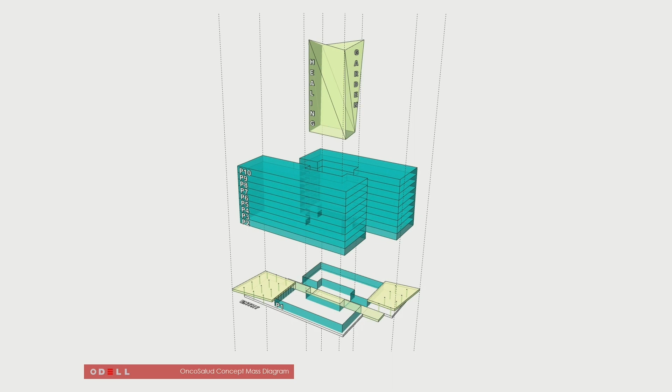The project itself began in schematics as it's an addition to an existing hospital. And so we began the schematic design in 3D. So the whole process has been in 3 dimensions. It's all been a BIM-based collaborative process. Working it onto the site, where it goes on the site.

The goals of this presentation is not about the design of the project. It's about the integrated delivery that we've been managing through a cloud platform. So in order to attain success, we must have an integrated project team. That is the only way we're going to find success in these projects. So again, half in the States, half in Peru, 2 different languages, 1 model, 1 collaboration platform.

So how are we doing this? We're doing this in multiple ways. We're doing this through SharePoint. We're doing this through BIM 360. We're doing this through the Revit Viewer platform that Autodesk has provided us. We're doing this with Bluebeam. So those are our 4 main tools. That's really almost all the tools we need to do the collaboration.

One of the goals that I always bring, I've been the director of BIM at Odell for about 6 years. And before that, I was BIM guru at another large firm, and before that, another BIM guru. And the thing that I've learned is, if you can do it in a simple way, you do it in a simple way. You never go overboard, because you do it simple here, then you do it simple here, then you do it simple here. And the next thing you know, you have this really complex system, but every step is really simple.

So we talk about the BIM execution plan. And we talk about it in terms of how it fits in with the whole scheme of things. And it's typically from a contractor's perspective.

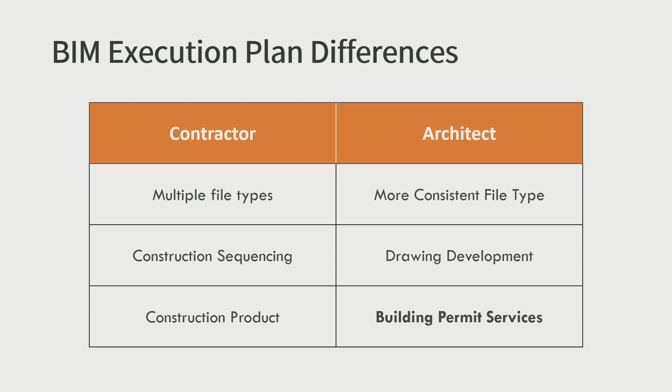It is a necessary file, because they're getting file types from all kinds of different places. They have to bring them together. They have to link them together. They have to make it work together. So all of that takes a lot of organization. And that's what a BIM execution plan is about. It's about how to organize your work, to collaborate with disparate teams.

So what are we doing right now? We're collaborating with disparate teams, but not in terms of a contractor's approach, but in terms of a design-based approach. We have consistent file types. They're Revit files, they're PDFs, right? We have some CAD files of existing conditions.

We have drawing development, and we have to obtain a building permit. So that's something contractors don't have to do. So that's one of the main differences between an architect's execution plan and a contractor's. The contractor doesn't have to create drawings in the way that we do. And so when we create drawings, daggone PDF, I got to click a bunch of times.

We have very specific challenges as to what we have to attend to when we're organizing our work. And that's what a BIM execution plan is about. We have to pull things out of the ether. There's nothing before there is an architect, right? We have to give presentations.

In order to give a presentation to a client, you have to have a high level of detail. Like level of development - does that even apply to design? Level of detail, sure enough, does. You have to have a high level of detail because you don't want that client to get caught up in that handrail detail you pulled offline that has nothing to do with everything else. But now all they can do is focus on that ugly handrail, right? And so we have to model to this high level. That is our challenge, right?

And then we have to do all of this, and we have to get drawings. So this presentation isn't really as much about what is an architect's BIM execution plan as it is why we need one. We take these models. We are the grand collaborator or the grand coordinator. We have to coordinate everyone's work, right? We get these models, they're all Revit models, we make sure they link together well, yada yada yada. That's all good. But then we have to make drawings out of them. And then we're expected to put data into them, to bring in the information, to use the open standards, to do all this. And it puts this heavy pressure that is simultaneous with the pressure to create drawings.

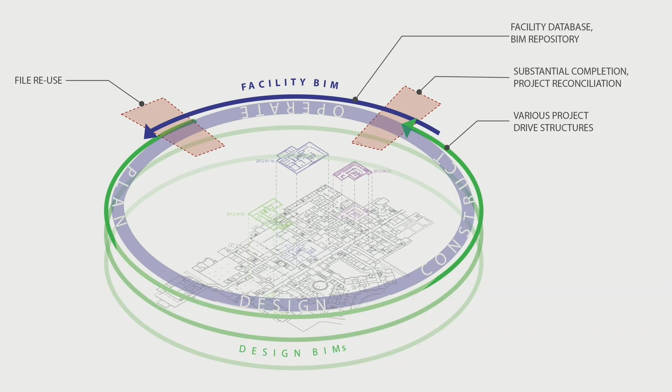We talk about a data ecosystem, that if you get the data in, you start to build the data ecosystem, and you can return the drawings back to the facility team, and they can bring them back into their repository, and then they can give them back to you. And won't it be great when you start a project with those brand new files? Yes, it all will be, but we still have to create drawings, right?

So our challenge is very enormous. And if you look at where the pressures lie about what an architect has to do, the amount of time we spend in the process is longer than the contractors, is maybe, I don't know, according to this diagram, it's longer than the facilities, but that's only dependent on all those other things of where money comes from and all that stuff. But think about how much information goes on before the contractor's BIM execution plan takes place.

The planning, the multiple design options, the redesign, the re-redesign, all of that stuff that gets put into a Revit model that's decided on by interns, by young modelers, by project architects who are trying their best to also support their client.

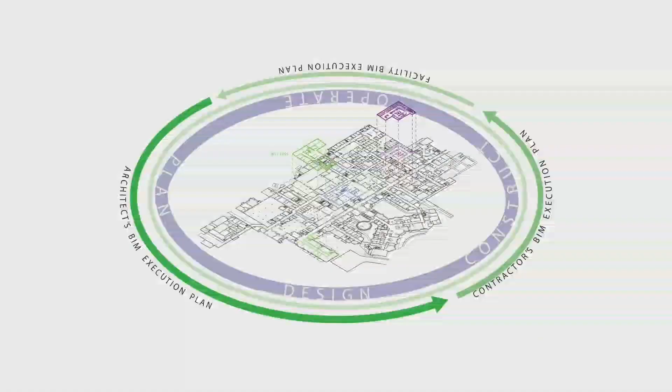That's a lot of time where there is no industry standard execution plan written. Penn State wrote some great ones, but it's all very heavy-handed on the contractor's side. You start talking about front-loading and how you want to front-load. But if you start looking at these two diagrams, let's see if this actually works. It does. Look at these two red dots.

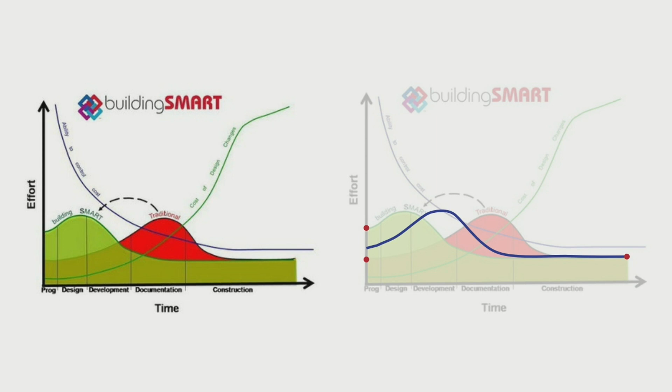This front-loading diagram is dependent - this diagram, not all do, but this one does - on you as the architect receiving more information at the beginning of the project than in a non-BIM project. So the only way to receive more information is to get more information from your owner, which is dependent on the life cycle, which is not existent in very many places right now. So we're kind of all flabbergasted about how to actually do this.

So what is the need? What needs to actually go into a BIM execution plan for architects? If this document is so needed to make all this work, what would go in it? What would go into an architect's BIM execution plan?

Did this just turn off? No, it didn't. Okay.

So, you know, the industry standard at the beginning was, well, you have a design model, and then you turn that model over to the contractor, and they send it out to all their subs, and then the subs send it back, and then it becomes a record model, and that's BIM. Bada bing. But the reason we're here today is we know it's not that simple. You know, it's just not that simple.

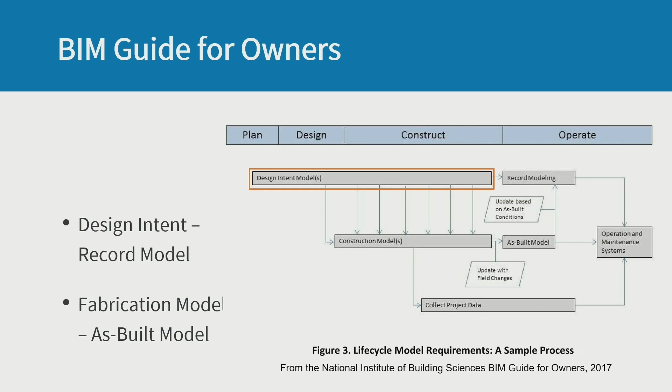It takes a long time to create that model for the contractor to use. So the old adage: you begin with the end in mind. If we're going to design a document for architects to use to make an industry standard for what a design intent model is, to make all of our lives easier because we can all agree on it, right? But what are we going to do?

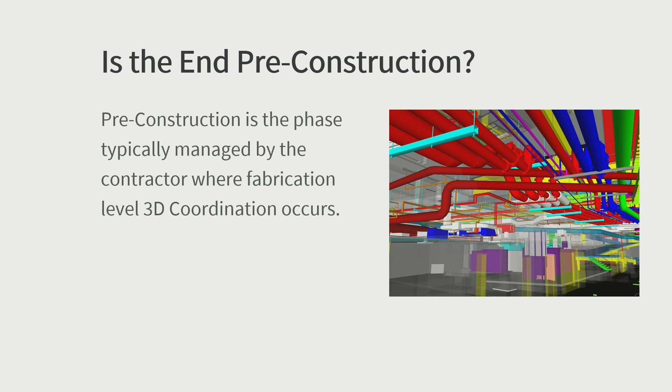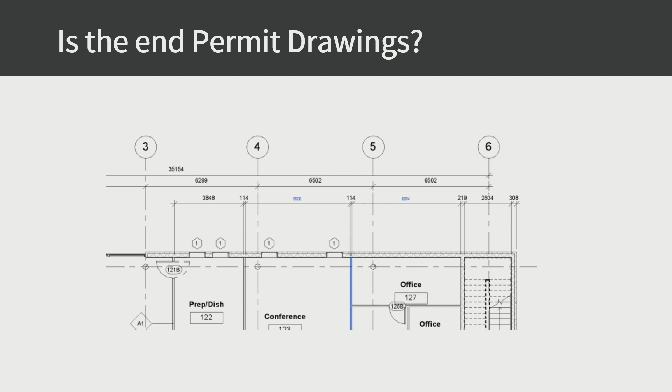Let's begin with the end in mind. We'll use pull planning—everybody in this room most likely knows what pull planning is. But is the end the pre-construction phase? Is that what we plan for? Is the end facilities management? Is that what we plan for? Is the end permit drawings? Is that what we plan for? There is actually no answer to that. All of it could be the end. And that's where the problem is with the architect's BIM execution plan.

Projects define what the end is. So if you're going to have a document that's going to define this very obtuse process, can it be a one-hit wonder—one document that supports multifamily and one document that also supports healthcare? Probably not, but maybe, right? We all have to hit drawing sets.

So you go to these TED Talks, and they always talk about what's your core value? So what's your core value that you need in a BIM execution plan for design?

You need to know how to do your permit sets. That's one thing—you have to attend to each one of these. So let's start with permit sets. You have to know what you need, the core thing you need out of your Revit model.

You need to know your linking structure. You need to manage your visibility control between links. It's not appropriate to open up other people's models, so you have to manage visibility through the link.

Permit sets are a legal formality right now. At some point we can build without a permit set, but the requirement is not waning. It's there, and it's going to be there for a while until we can officially stamp a model and jurisdictions can review a model. We're going to be creating drawings. So this is something that's very unique to the design process that's not going away—we have to attend to it.

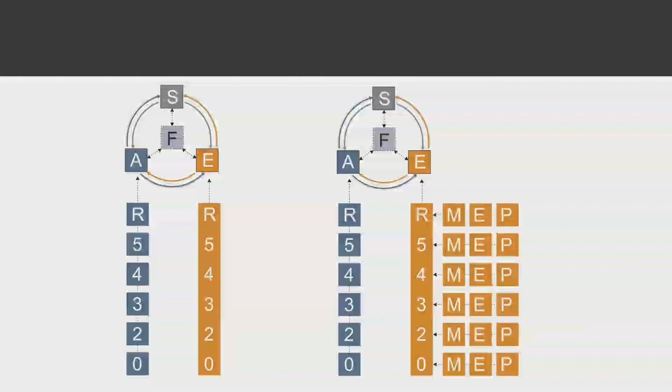So have your linking strategies for what people choose from. Have a standard one. Understand that your owners might require a very specific linking strategy for their check-in and check-out procedures. Many separate it out floor by floor, so they can give architect A floor 1, and architect B floor 3, and get those models back and feed them into their facility model with ease.

You have to understand that if you get this kind of linking structure, you immediately know that the owner has very specific requirements, and you should go hunt them down, because most likely they're fairly pragmatic and they'll make your life easier.

If you're going to have the owner strategy where you have floors linked together, you can't do that as well for MEP because it's one big calculator of a model. But you might have a permit going out for the shell and core, you might have a permit going out for the ground level tenant, and a permit going out for the 4th floor tenant, all at different schedules.

And so these are all different sets of drawings. These are all different permit drawings. So another linking strategy is, all right, how am I permitting this thing? I'm going to link everything by permit. It's another linking strategy you can bake into your project execution plan.

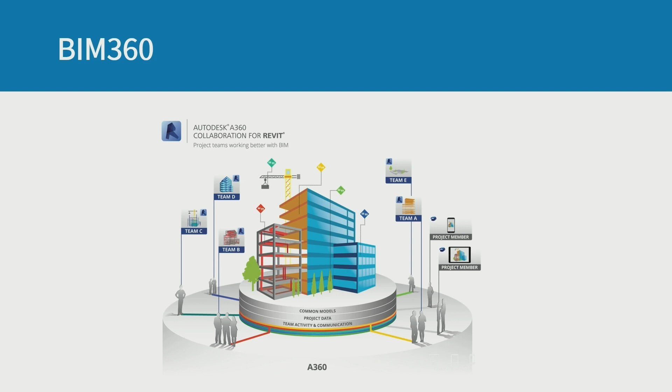Are you using Collaboration for Revit? Yes, no. If you are, who's the admin? Put it into your BIM execution plan. Who should you call to get invited? Who's the admin? What's the process for that? And are you collecting data? What kind of data are you collecting? Where should it live? Basically, I'm marching out what the table of contents of a BIM execution plan should be.

So I'm going to move on pretty quickly so I can open up the next one. But before I go too far, one other thing we all have to remember when writing this document, because without a doubt we should be writing this document as an industry group, is we are providing a service and not a product. The model we're creating is an instrument of our service. It does not have to be perfect. It is design intent, meant to support the services we're providing our owner.

A lot of times when you get the idea that you're going to standardize and control it all, you start to think of it as a product, and you start to think of it as perfection. That's just a thing we all have to keep in the back of our mind, that's not what it is. So what is a BIM execution plan? It's something that can help you with your scope, schedule, and budget. It's something that can standardize your process a little bit more, so you spend less time worried and more time providing your design services.

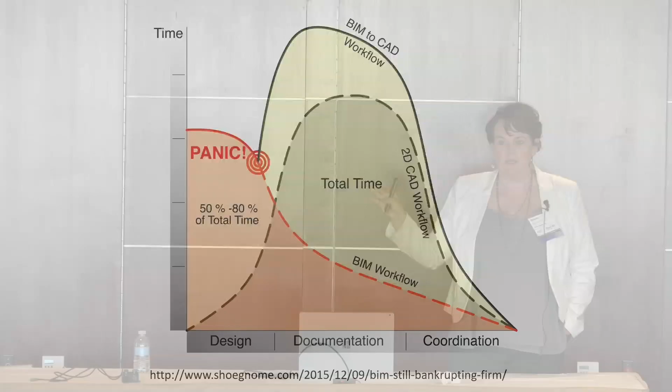This is a great diagram of the 2D CAD workflow and the promised BIM workflow. This is what happens so many times, where you hit a moment and you're like, I can do this, and then you hit this moment and you panic. And you just go crazy, right? All of a sudden, all this time is wasted. And the principals are leaving the office a little embarrassed because they know their interns are going to be there all night long trying to make this work.

It's a scary situation. So how can you bring it back down to an idealized BIM? You can bring it back down with standards. You can bring it back down with a standardized process. This is something the industry needs to help us with.

Creating a standardized BIM execution plan is a very important next step in the development of BIM in the industry. I have one that I threw together for my firm because we needed it. Is it official across the board? I'm only one person, right? But the goal is to templatize our work so that we don't have that panic moment.

We've had really great success with a particular organization down in Orlando, a lot of great success with IPD down there, and a lot of great success internationally. Our one firm with two offices works seamlessly together because we've all invested in the same set of standards and processes, since we created this BIM execution plan together as a group.

So let me see if I can open it up without the computer freaking out, because it freaked out earlier, if you guys saw. Let's see here. Wrong one. There we go.

So I'm going to use our BIM execution plan, which starts out with a title. Come on now. No, it is freaking out.

There we go. So we go to our table of contents, which it's not showing up on the screen. Is it going to work? All right, I'm just going to have to talk you guys through this. It's only a Word file, so hopefully this will work, but I don't feel like sitting around fidgeting with all this in front of you guys.